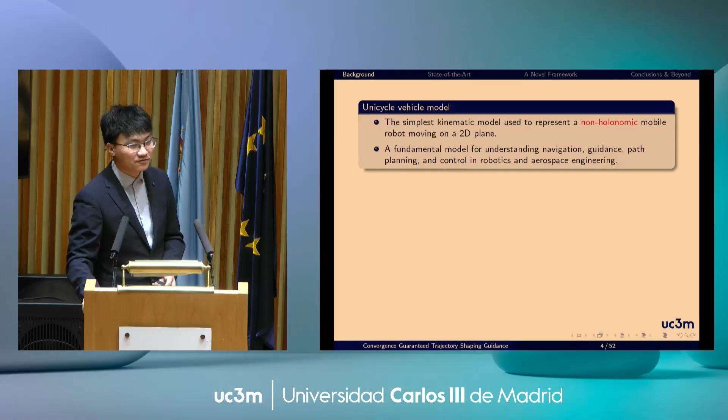So what is a unicycle vehicle? It's the simplest kinematic model widely used to represent a non-holonomic mobile robot moving on a 2-dimensional plane. And it's also a fundamental model for understanding navigation, guidance, path planning, and so many other things in robotics and aerospace engineering. So this picture shows the frame for UAV's planar motion. And so we have the state vector. It includes the position, x, y, and the heading angle, theta.

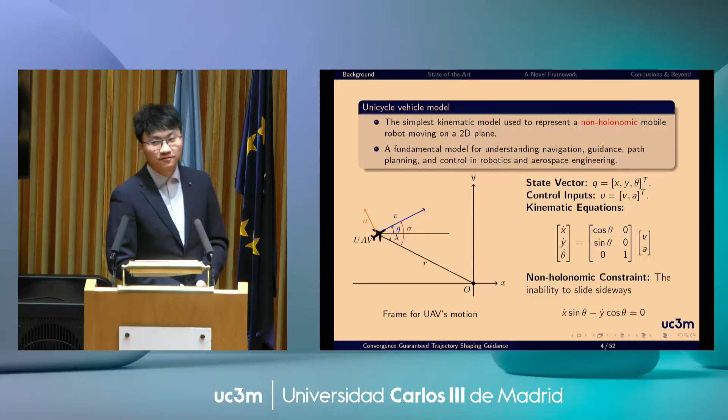In this frame, the lambda is the line of sight angle, and the sigma is, we usually call it the look angle. And the control inputs, we have the linear velocity and the lateral acceleration. And the acceleration, A, is perpendicular to the velocity vector. And we also have the kinematic equations written in matrix form. And for this kinematics, we have a non-holonomic constraint. It means that the vehicle cannot slide sideways.

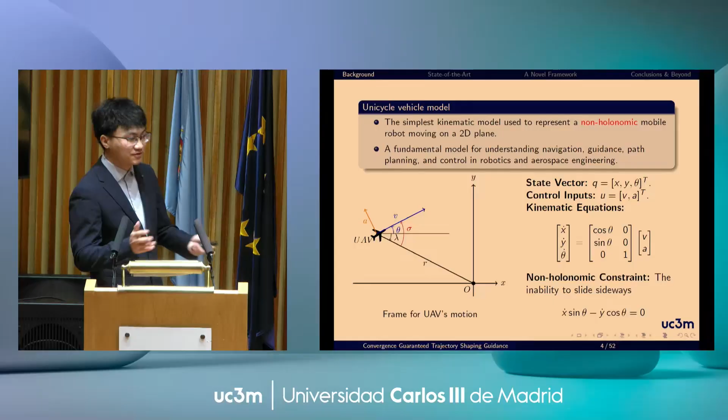Imagine that you are driving a car and you need to do a parallel parking. To do it, you must first go forward and go backward. You cannot just slide sideways to your parking spot. So this model is equivalent to several platforms, such as differential drive robots, automated guided vehicles, and especially fixed-wing UAVs. When flying at a constant altitude with a constant speed, that means the velocity does not change, this model becomes the Dubins vehicle, which is widely used for aircraft trajectory planning.

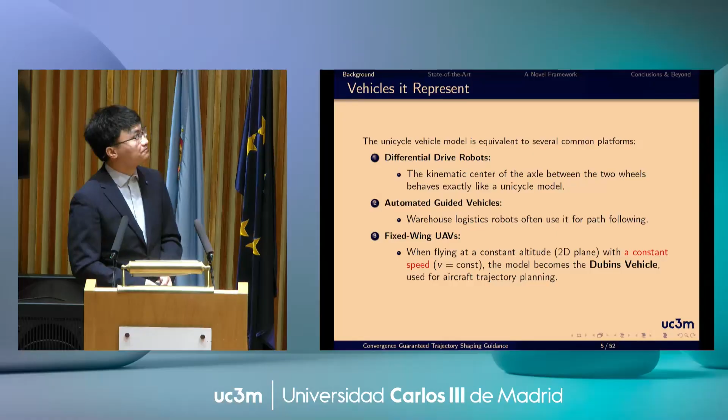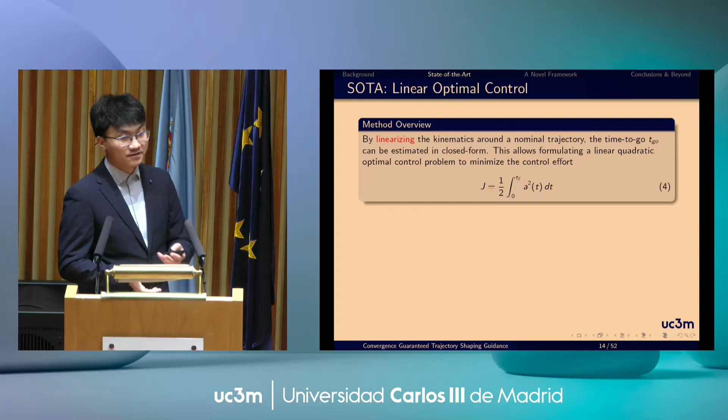So this work can be traced back to 2006. There are plenty of works since then. So some representative methods include linear optimal control, nonlinear control, trajectory shaping, which is one of our topics today, and machine learning. So linear optimal control to solve this problem linearizes the kinematics around the nominal trajectory, and therefore the time to go, meaning the remaining flight time before reaching the target, can be estimated in closed form. Therefore, we can formulate a linear quadratic optimal control problem to minimize the control effort. The control effort is related to something like energy consumption.

So the advantages include they have closed form solutions for linear optimal guidance laws, and therefore it's computationally efficient for real-time applications. Of course, there are some limitations. The first is it has to estimate the time to go, but the time to go becomes very inaccurate for large heading errors. By this, I mean the trajectory is highly curved. And the second limitation is that the convergence is not guaranteed for all possible initial conditions.

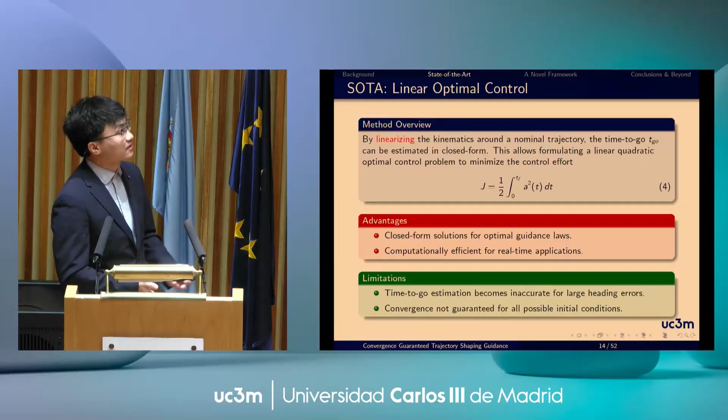And the third method is trajectory shaping. Within this framework, the state or the control trajectory is parameterized as a function of time or other states, and the guidance problem is transformed into finding the guidance gain by solving some nonlinear equations. By this, we can incorporate all the boundary conditions into trajectory shaping. And therefore, all we need to do is to solve some nonlinear equations, which can be solved by Newton's method.

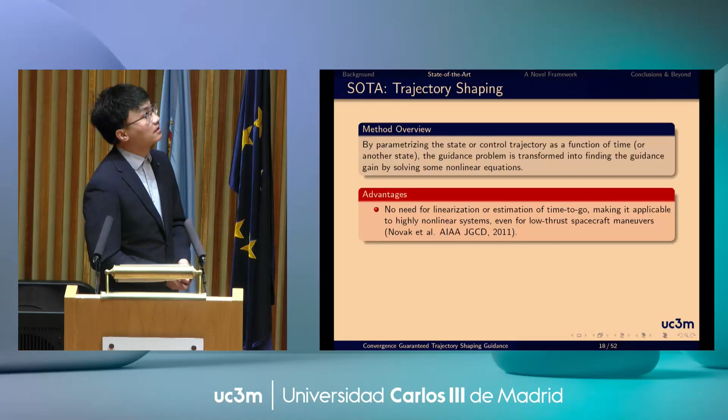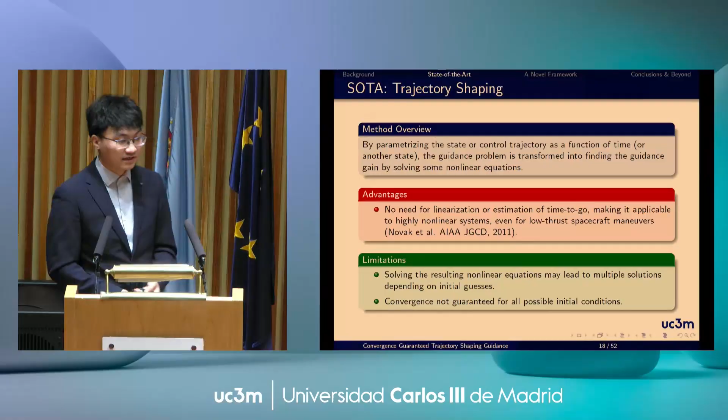The advantages include there's no need for linearization or estimation of time to go, making it applicable to highly nonlinear systems, even for low-thrust spacecraft maneuvers. And there are some limitations. The first is solving the resulting nonlinear equations may lead to multiple solutions depending on initial guesses, because with different initial guesses, the solution might converge to different solutions. And of course, the convergence is not guaranteed for all possible initial conditions.

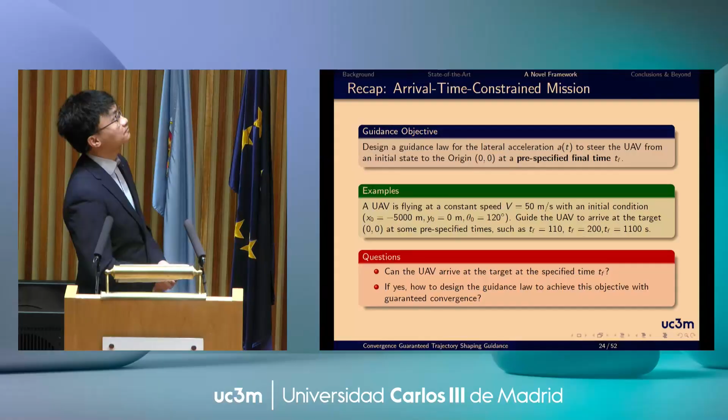She wrote the look angle as a cubic polynomial, and it's clear that with equation 5, the boundary conditions on sigma can be satisfied. And equation 6, because we have r dot equal to minus cosine sigma, by doing the integration, equation 6 ensures that the vehicle arrives at the target at the specified time tf. So right now the nonlinear guidance problem becomes solving equation 6. So it's a root-finding problem.

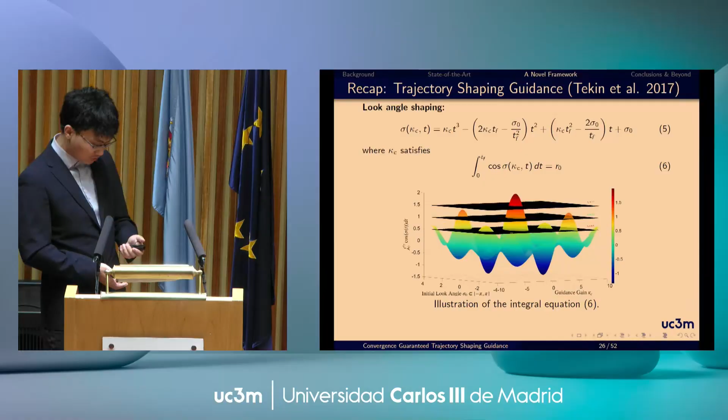So this is also from my previous work. We derived some additional optimalities based on the geometric properties of the optimal trajectory. For optimal control, we can use Pontryagin's minimum principle or KKT conditions, but they are all necessary conditions. So by analyzing the geometric properties, we have some properties such as symmetry and scalability, and the last is an additional geometric optimality condition.

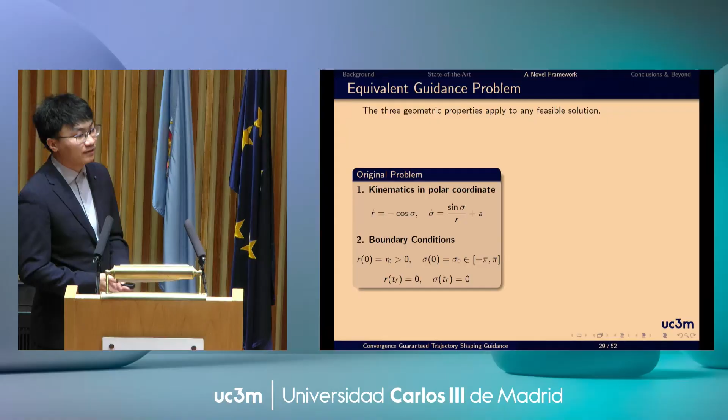And also, because of the symmetric property, we can just consider the initial condition for the look angle, because originally the look angle can take values from minus pi to pi, and now we only need to consider from 0 to pi. And third, we have a path constraint. It means that the look angle cannot change its sign.

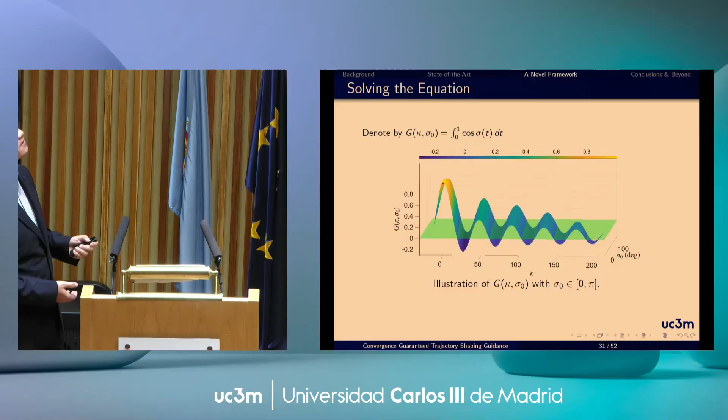So here's a picture that shows the integral of this. We have g of the guidance gain kappa and the initial condition sigma naught. To solve this equation, from this figure we can see it's also not easy, right? Let's say we set R naught to 0.5. We draw a plane like this. We can see it also has multiple solutions. So we need to dig more.

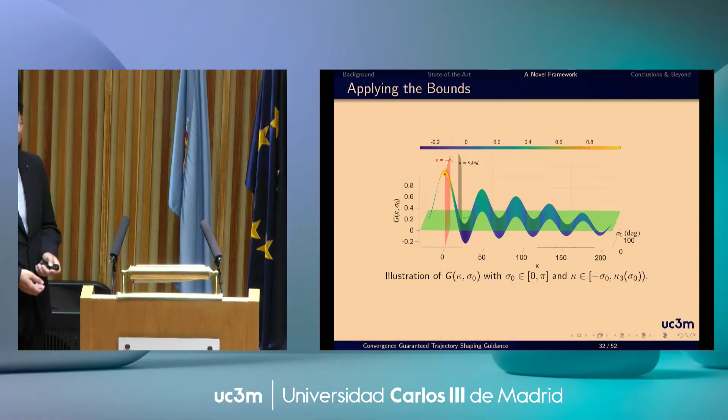So we just derived the bounds on the guidance gain from this figure. We can say that this is the lower bound on the guidance gain, and this is the upper bound. So from this figure, the problem becomes much easier, right? And also we need to consider another constraint, the initial distance R naught. R naught cannot be negative, right? So R naught should be greater than 0 and less than 1.

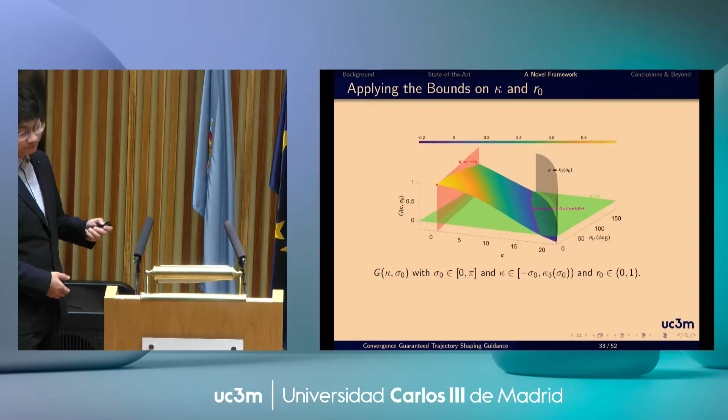So with that, we can draw a figure. This is the lower bound on the guidance gain, and this is the upper bound. And this plane shows when the function g is equal to 0. Because we have to solve the equation g equals R naught, and R naught must be positive, we can see that the guidance gain has a narrower bound. The guidance gain must be less than this curve.

So with this, we can say that if the guidance gain takes values between the lower bound and this bound, the solution will be suboptimal because the look angle does not change its sign.

So right now we have a smaller bound. And also from this figure, we can see that R naught also has some limitations. So here's the theorem that gives the condition for the UAV employing the proposed guidance law to arrive at the target precisely at TF equal to 1.

So the proof is quite easy. From this figure, we can see that the function g is monotonically decreasing with respect to the guidance gain kappa. And the maximum, Gmax, is obtained at kappa equal to minus sigma 0. So therefore, we have the equations.

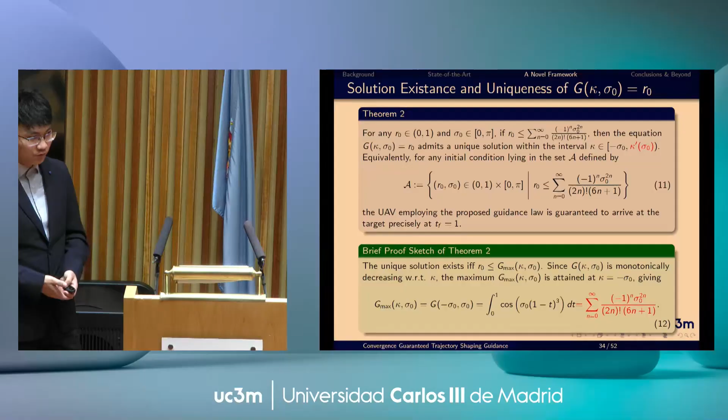So as a result of theorem 2, for a UAV with an initial condition R naught prime, where the prime means the actual flight speed, because when deriving the equations we use the assumption that the constant speed is equal to 1, we have the bounds on the achievable arrival time. So it means that the arrival time you want to achieve must be greater than this value.

So back to the example before, we can see that the achievable arrival time is actually greater than 134 seconds. So if you assign an arrival time of 110, the mission will not be successful.

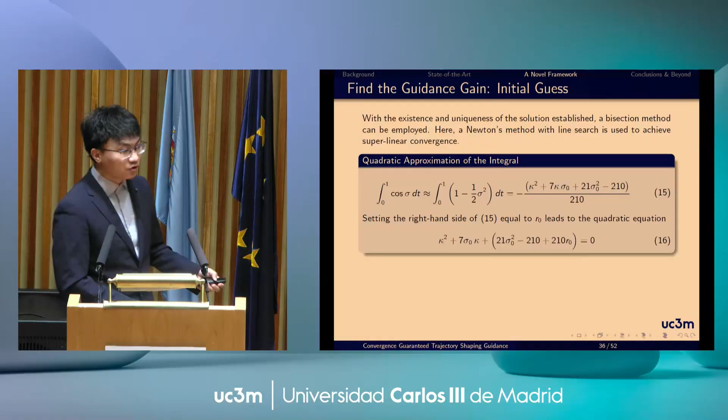So right now, the guidance problem becomes a root finding problem. And when using Newton's method, the initial guess is also very important. Because we also have the lower bounds and the upper bounds, we can use the bisection method to solve this problem. But it only has linear convergence, so therefore we use Newton's method to achieve superlinear convergence. So we use a quadratic approximation of the integral. We derive this equation, and so for the guidance gain kappa, it's actually a quadratic equation.

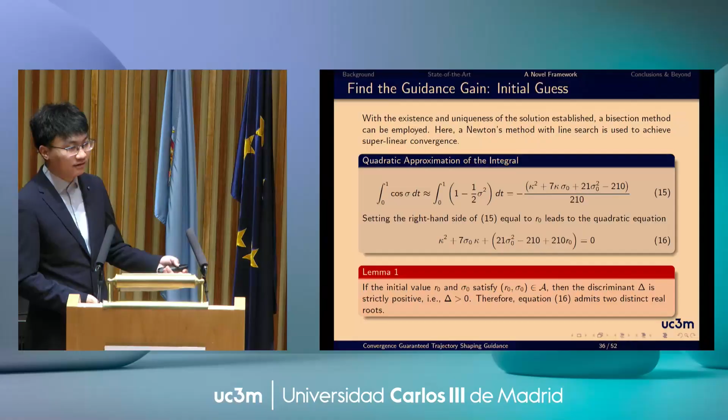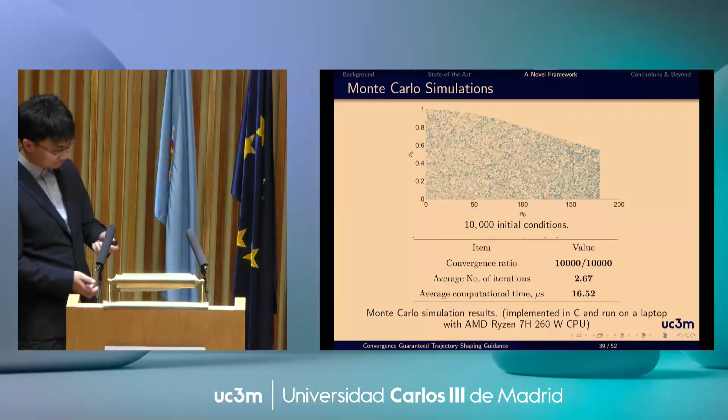Now we'll talk about some numerical simulations. So we conducted 10,000 initial conditions. Because we derived the achievable arrival time, it's not a square; instead, it's like a trapezoid. All conditions converged, and the average number of iterations is less than 3. And the computational time is only 16 microseconds, which is far less than the guidance cycle. So therefore, the proposed method can be applied on board.

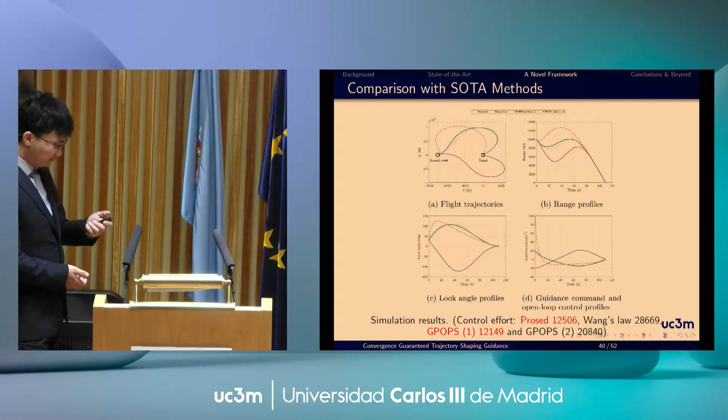So this shows the comparison with state-of-the-art methods. With different methods, we have achieved different control efforts. And it's worth noting that the proposed method achieved a control effort, and when using GPOPS, we obtained 2 solutions. So it's clear that the proposed method can lead to a suboptimal solution, and it's generated in real time.

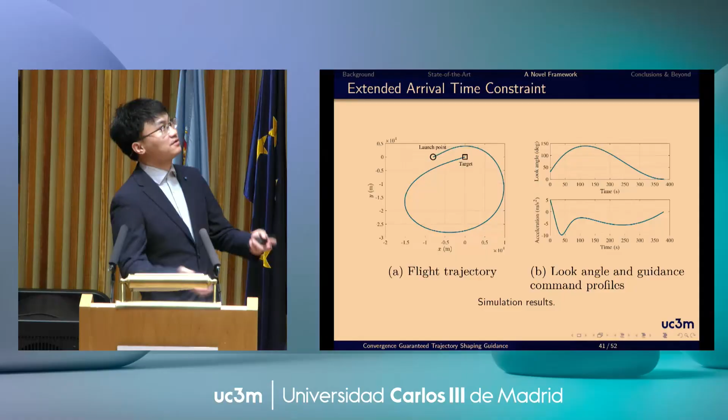So right now, I'll come to conclusions and future work. A novel framework combining optimal control theory and trajectory shaping guidance to design arrival time constrained nonlinear guidance with guaranteed convergence. The analytic bounds on the achievable arrival time are written in series form, allowing us to check the feasibility of the mission a priori, meaning that we don't need to run any simulations. And also, an efficient algorithm is developed. The performance is close to the nonlinear optimal control solution, but it requires significantly less computational effort.

So this is another work. Actually, I just finished this work yesterday.

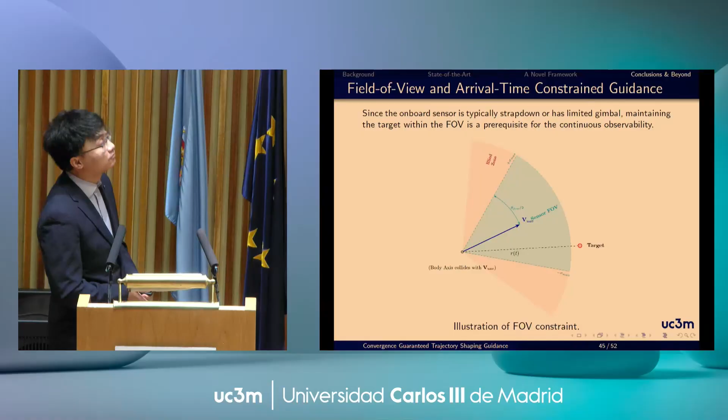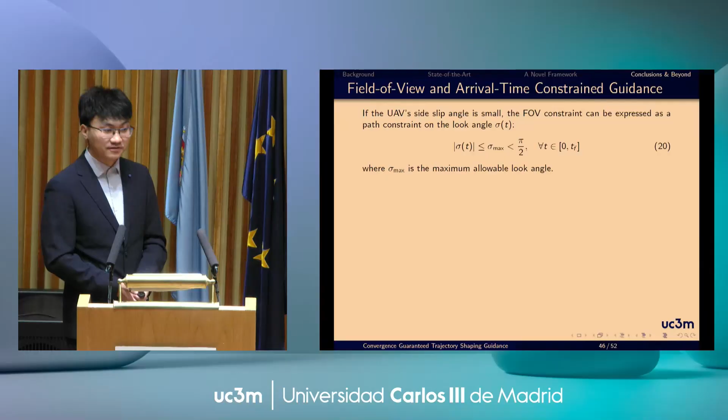So in actual scenarios, since the onboard sensor is typically strapdown or has a limited gimbal, maintaining the target within the field of view is necessary for continuous observability. So in this figure, this is the target and this is the UAV. To maintain the target inside the UAV's field of view, its look angle will be constrained. Otherwise, the UAV will lose the target. So therefore, we have another state constraint for this guidance problem.

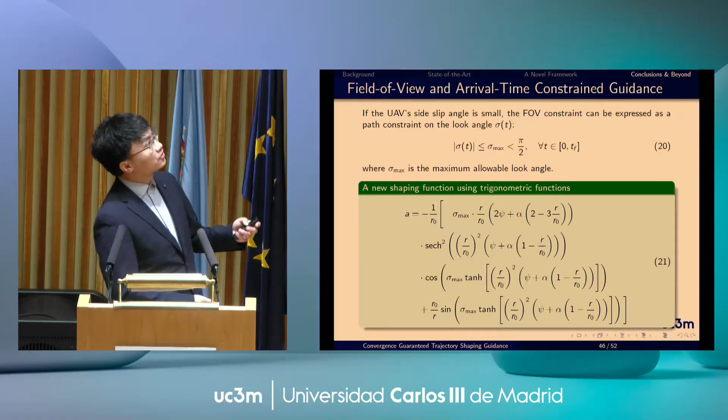So this is a new shaping function. It uses trigonometric functions to satisfy the look angle constraint. And so here's the video.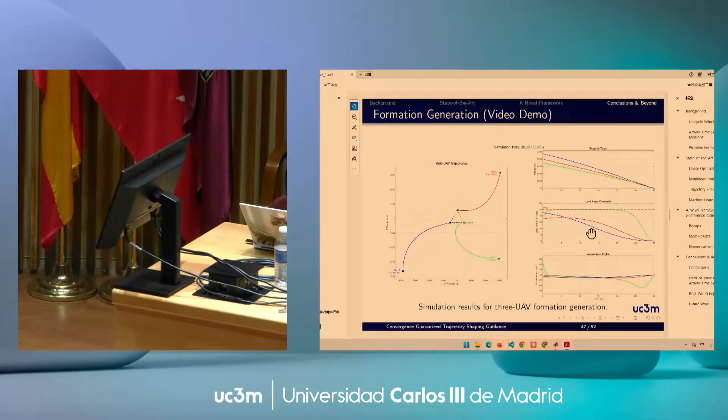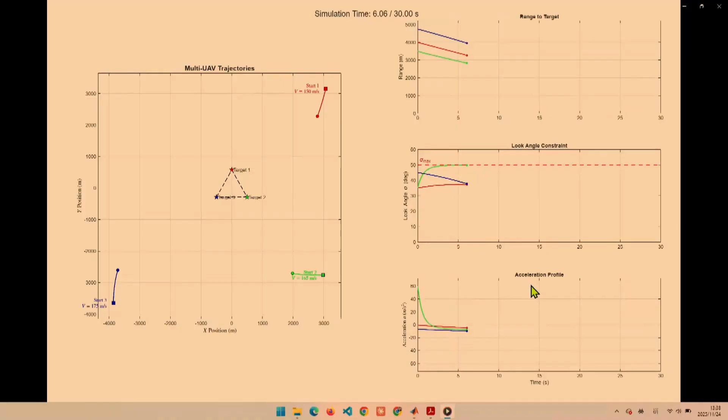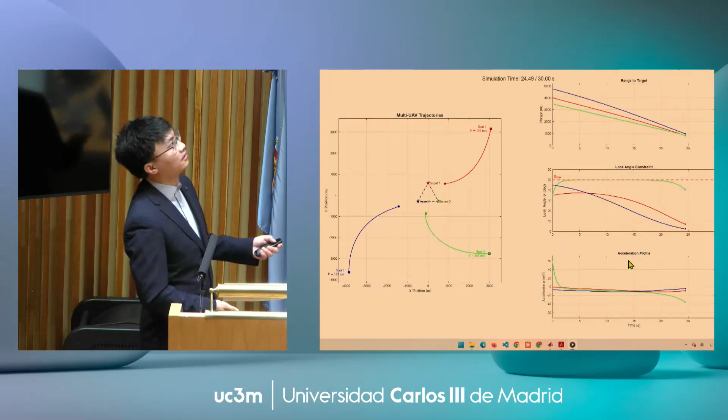So we have 3 UAVs. They start at different initial positions, and they are also flying at different speeds. And to make sure that the target is within the UAV's field of view, we have the look angle constraint. And the objective is to guide 3 UAVs to achieve a formation, so you can see they arrive at a triangle at the same time.

So it's clear that the look angle constraint is satisfied, and all the guidance commands are generated in real time.

So another future work is to conduct real-world experiments. So this is the basic idea to apply the proposed method to real-world experiments. So first, we need to assign the arrival time to the guidance system. The delta t means the time step for the guidance cycle. So we need to use bank-to-turn to achieve the normal acceleration command.

This Friday I will go to University of Granada and talk about the real world experiments there.

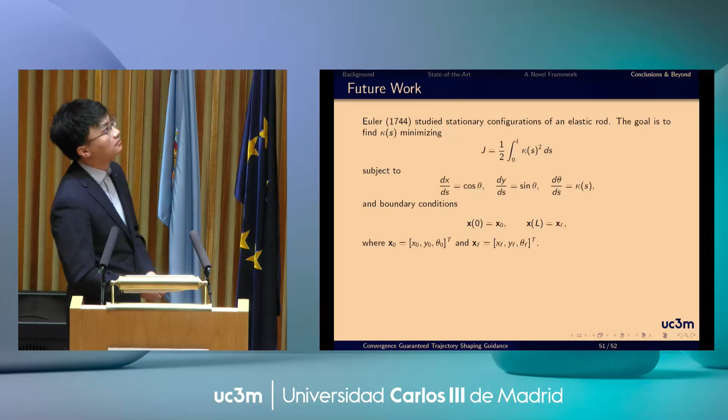This problem is fundamentally important in robotics, solid mechanics, aerospace engineering, and biophysics. But to date, closed form solutions are only available for very special cases. So my idea is to extend the proposed framework, that is to use the insights from optimal control theory to derive a suboptimal solution, because obtaining the optimal solution is extremely challenging. Hopefully with guaranteed or high convergence for this problem.

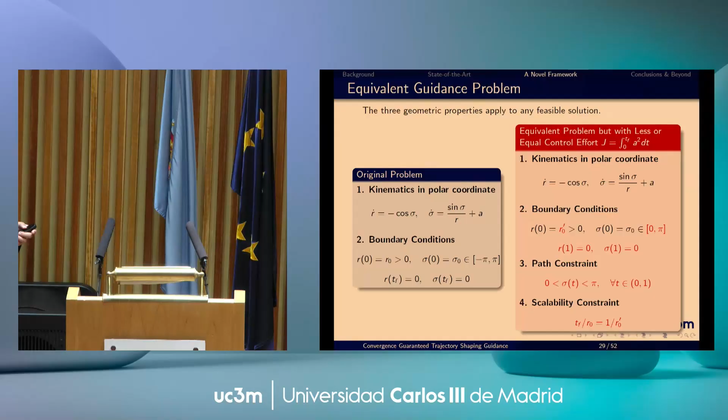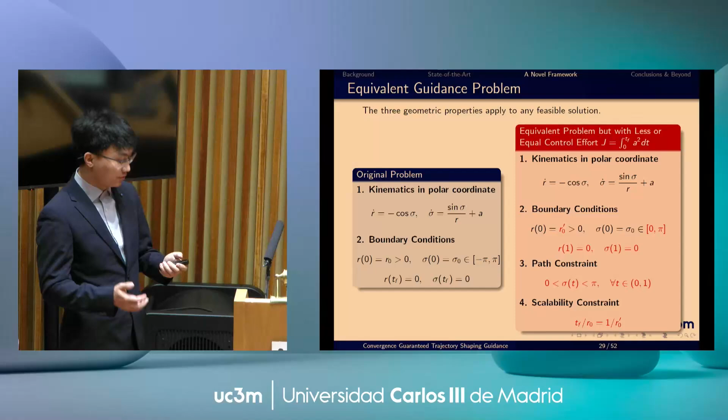Yeah. So when we shape the look angle, it should satisfy the boundary conditions. So right here we have the boundary condition on the look angle. We have sigma naught equal to sigma naught, and at the final time, sigma should be equal to 0, and so with this equation, the two boundary conditions are naturally satisfied. Okay, thanks.

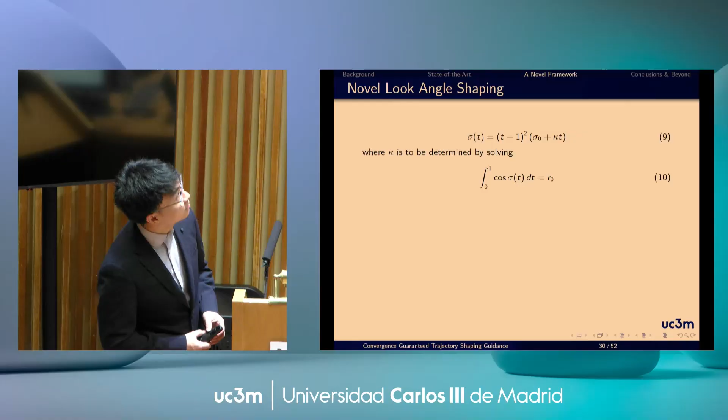Okay, thanks. And is there any physical or geometric meaning to the profile? No. There's no physical meaning, because this function is a cubic polynomial, and it's very simple. Actually, it's from previous work done by Tekin, and in this work, it's showing that sometimes the solution is very close to the optimal solution. So therefore, I still use the cubic polynomial for this problem.

Okay, thanks. And a second question about the time. So you're assuming that we have a specified final time TF. I was wondering if, as an extension, we could allow for variable time and treat that as another variable. Yeah. So that's another scenario, like multiple UAVs that have to communicate with each other to synchronize the arrival time. Right now, my work does not consider communication among different UAVs. If they have communication, they can change the final time to synchronize it.

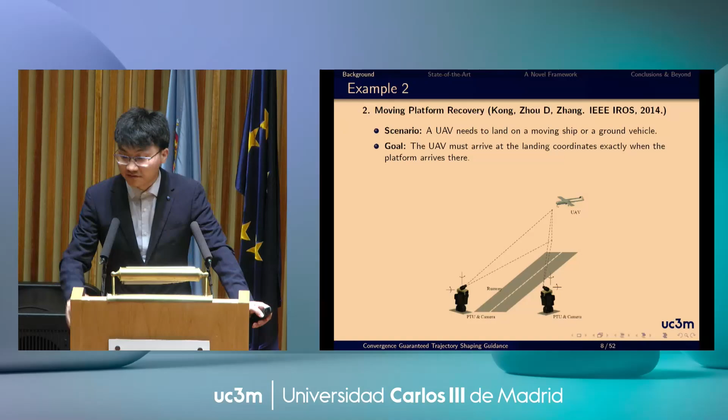As long as the computation needed to generate the guidance command is less than the guidance cycle, it means that the guidance command can be updated during every guidance cycle. So therefore, if we consider UAV dynamics and other things, I think as long as the flying speed does not change a lot, we can still get good results. I hope that answers your question.

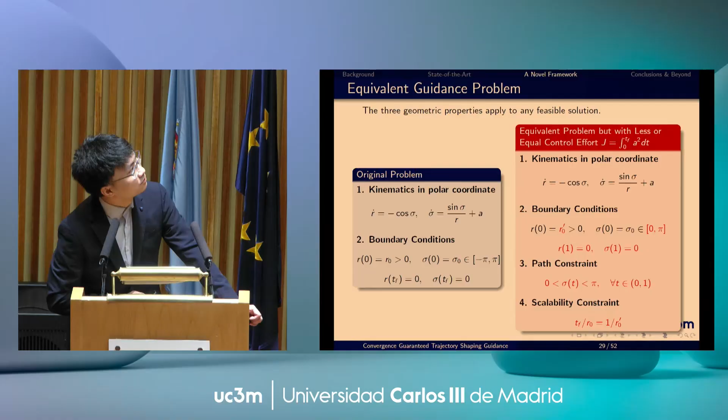Thank you very much for your presentation. I have one question regarding multiple UAVs. Could you move to that slide? UAV kinematics? Yes. No, multiple UAVs in your future works. Okay. So how did you come up with the guidance profiles for the 3 UAVs? Did you consider them together in the framework of the optimization, or did you derive the guidance separately? I'm sorry, can you?

Did you consider, for example, conflicts between these trajectories? Did you consider all the 3 UAV guidance in separate steps or at once? They are separated. Okay. All 3 vehicles are separated, and they don't need to consider other UAVs' motion. For this problem, I just assign the target position for each UAV, and I assign an arrival time for them to arrive at their target position at the same time. And there is no communication among the UAVs. Okay.

But you think your framework can accommodate that? Considering the 3 or more UAVs together while also guaranteeing no conflicts, for example. Because the guidance for each UAV is entirely separated, it does not matter how many UAVs you have. So I guess the second question is to consider the communication, right? To adjust the arrival time.

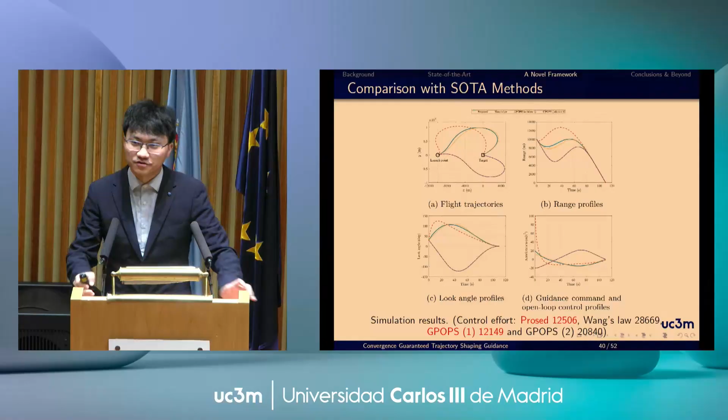I think I also have the code on my laptop, and it's based on the indirect shooting method. And when you use that, sometimes you will get very strange solutions. Okay, but then the problem is in the numerical approach to solve the resulting set of equations. Okay. Good. Thank you. Okay, thank you.